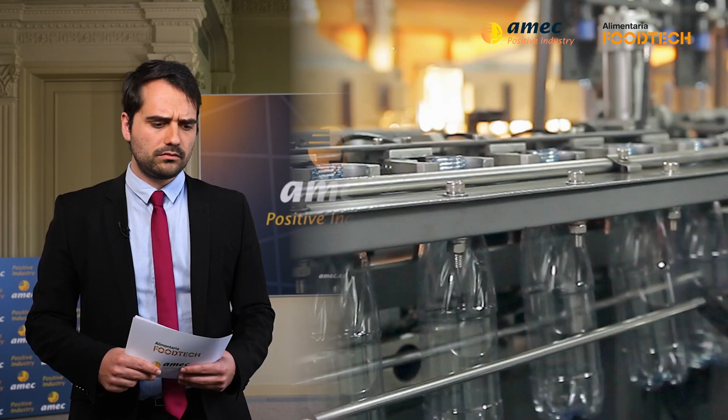With a strong transversal character, the event serves the food and beverage production industry, from raw materials to commercial distribution, including all solutions in areas such as processing, ingredients, label packaging, Industry 4.0, food safety, refrigeration, industrial and auxiliary services, handling, storage and logistics, and as a novelty of this edition, Smart Agro.

Naturally, it also addresses all processes: food processing, ingredients, food packaging, Industry 4.0, and food safety, as well as all subsectors of the industry - meat, liquids, fruits and vegetables, seafood, bakery, canned food, or snacks.

Furthermore, Alimentaria Foodtech is undoubtedly the meeting point of innovation for the most important companies in the sector, as well as small and medium enterprises, exhibitors, and national and international visitors.

This 2023 edition presents some proposals within this innovative framework that seek to further strengthen this competitive, disruptive character, such as the Innova Awards, the Emprende Awards, Ingrenova, where intermediate food products will be the protagonists, at the congress level the Biofilm Summit, and naturally the Foodtech Innovation Hub and Novarena.

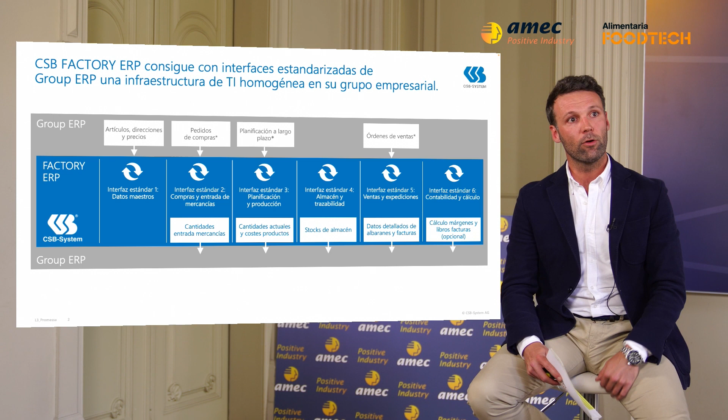In order to give a wider overview to the session today and the case we want to introduce to you, let's check the mother program behind this project, what we call Factory ERP. This is an ERP software solution to manage all the different plant systems in the industry. This solution, Factory ERP, is easily integrated using standard interfaces, in this case a group ERP for administration. We understand it as an administrative ERP where we can analyze accountancy and finance.

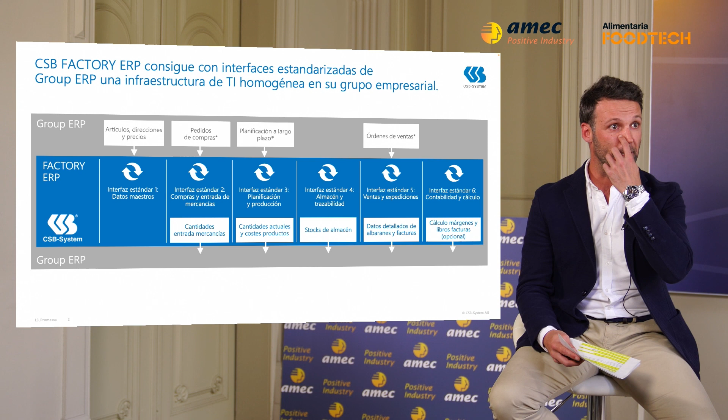However, CSB System also has a comprehensive separate tool with a module for accountancy and finance, but in case our clients feel already comfortable working in their own horizontal and consolidated ERP, we can get integrated into it. So our application supports integration with other ERPs and also integration with other partners or producers, especially for industrial equipment such as machinery and electronic appliances, PLCs.

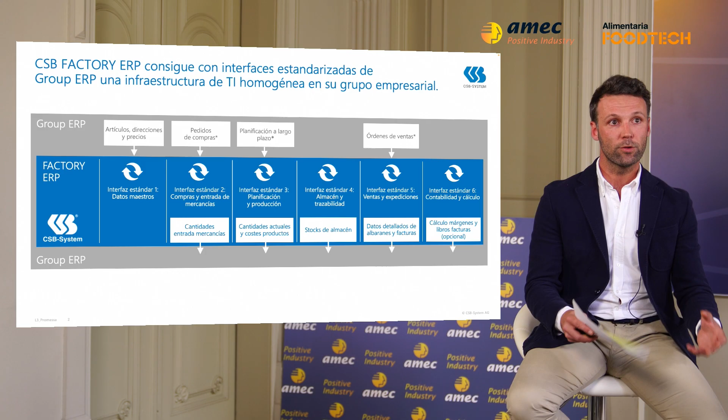RFID tags, etc. That's the reason why the session today we want to focus on how, using the automation and integration of all technologies under the same software solution, we have the chance and the capability to control everything that is going on in real time in our industry.

And the success case we want to introduce today has to do with the Dutch company Promisa. Promisa is a company dealing mainly with the production and commercialization of food products, meat products, and it has over 400 products that are distributed to more than 1,000 supermarkets over 6 days a week.

So in order to set the stage here, in the growing line of this company, they had been observing a need to find in the market some tool to digitalize different processes in the plant, because they thought they had breaches in terms of monitoring of processes, data, and work orders, and so on. This, along with their need for a wider space because they were not properly distributed, made them go to search to start up this project where they were looking for a combined solution between software from CSB SYSTEM and the hardware we're going to explain ahead.

So the project, in essence, was divided into big targets. First, digitalization, everything that has to do with the internal processes of the plant using the CSB SYSTEM solution, and then some other targets that have to do with the MFS or the material flow system. Among those targets, for instance, was better compliance with the expectations of the retail market of the country, better positioning against competitors, improve the internal logistics of the plant in order to reduce preparation times of their products and also costs.

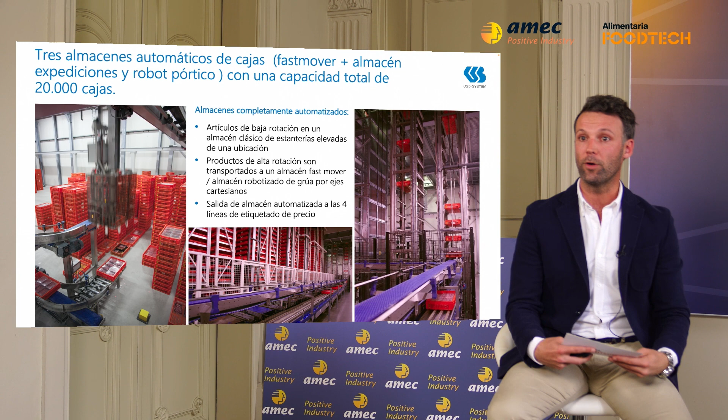Besides, in this project we have applied what we call merchandise-to-man technology. So these sorters or classifiers are separating trays depending on the work order they are processing.

Now I want to go more into detail regarding the tagging assembly lines and the communication and management between the different hardware partners involved in this project. First of all, one of the advantages that the operator has working with this machinery system is that she doesn't need to learn to work with different user interfaces, because all the management of the different processes, the communication with the assembly lines and the automated storerooms, are done from CSB systems. So the user has only one application from CSB system in which he can interact with the assembly line or with the storeroom in a frictionless way.

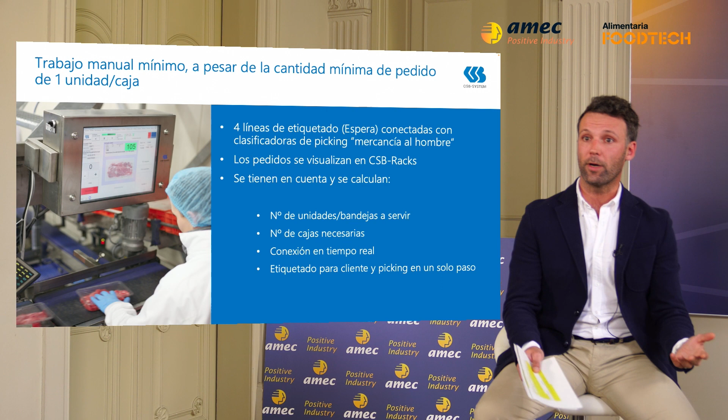So he can start the line, stop the line, and so on. Also, the operator can see the work order he's dealing with from the tagging line, what trays he needs to produce, how many boxes he needs. Also, all this productivity is real time, so from any spot along the plant we can monitor the progress of a work order in production.

For this project we have designed a technology in which in one single step we can perform two different actions. So from the moment we are tagging for the final client, all these different trays are identified, but they are also linked to the picking order for this client. So for this reason, later on we don't need an additional process to scan all the different tags.

I want now to go from the theoretical part to the practical side to show the outcome of the project back in the day. So this is the exit of the production line, and as you can see, we identify the trays or the baskets, not the boxes, by means of RFID, and then they go on to the storerooms we have already mentioned.

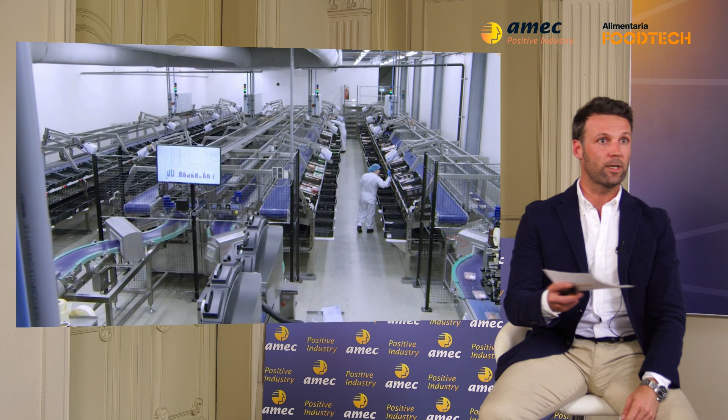This is the one with high rotation, with a big volume of products, that is automated and managed by means of the gate crane. And now we will see storage room number 2, the traditional and chaotic store. These two are the buffers that allow the product to enter into the tagging line, where the operator is checking the work order he's working on.

The 4 tagging lines are the ones feeding the 4 sorters, so we are using this merchandise-to-man technology I have mentioned, and then automatically when the basket is completed it goes on to the central line. So this merchandise goes on to the latest storeroom, where a robot also using this gate crane makes the stacking of the different columns for the final delivery to the client.

So all in all, the project, thanks to the technology of CSB systems along with some other hardware products, facilitated this client having faster reaction times. In fact, you can place an order in the morning, and even if it's one single unit, this is going to be delivered the same day.

Besides, in this project, we have included the chance to perform production along with picking, because we also have this 2-in-1 technology. Apart from this, all the business processes are much more optimized, balanced, and even transparent, and this also provides greater reliability to the final consumer. So in the end, this is a project we feel so proud of.

Thank you very much, Eric, for this very interesting case, this international success story, which this time has taken us to the Netherlands.

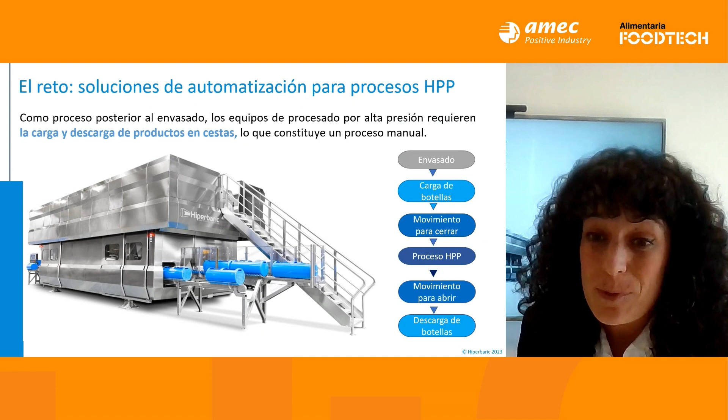So what is the challenge we face using our current machinery? Well, this is a post-process, so it entails a big volume of manpower for loading and unloading the machine. So the product has to be already packed, and once packed, we put it into the blue containers we can see on screen, and they go into the machine, so they are like transport means for the process. All this process is very manual.

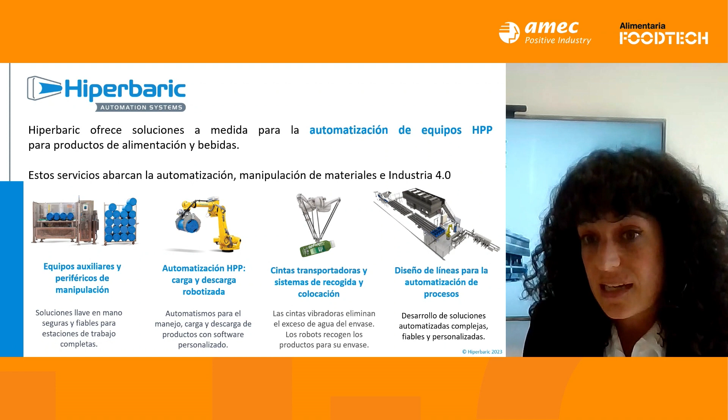Therefore, how is HIPERBARIC facing this challenge? Basically what we do here is provide customized solutions for the automation of this equipment. These solutions and services entail automation and manipulation of materials, and also Industry 4.0, which is the highest demand from our clients towards us. In order to provide this, we provide auxiliary and peripheral equipment for handling. We also automate the loading and unloading by means of robots. We also develop conveyor belts and systems for the picking and placing of the products, and we design lines for the automation of this process.

Going deeper into the success case, I'm going to give the context of Evolution Fresh. As I said before, it's an American-based company. They are the juice providers for Starbucks, for all Starbucks in the United States and Canada. They have 12 years experience working with high pressure, and they have five Hiperbaric 420 machines producing 3,800 liters per hour.

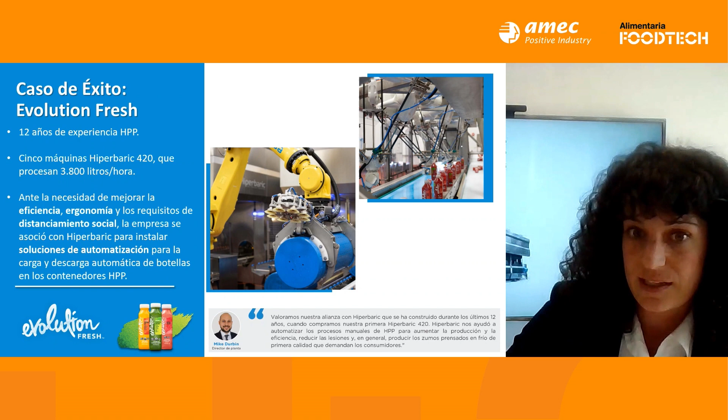Because they needed to improve efficiency, ergonomy, and the requirements of social distancing, the company decided to enter a new partnership with HIPERBARIC in order to install automation solutions for the load and unload of bottles in the HPP containers—those blue ones we've seen before that enter the products into our machinery.

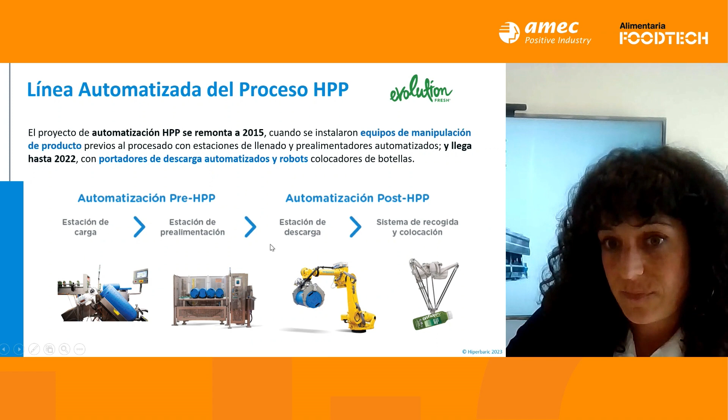In the case of Evolution, this development has been done in different stages. The first started back in 2015, where we automated the entering of the product into the machinery, adding loading and feeding stations. Then in the second stage, starting later after COVID, because they wanted to keep automating the whole line, it started in 2022, so we automated the exit of the machinery, incorporating unload stations and systems for picking and placing the bottles.

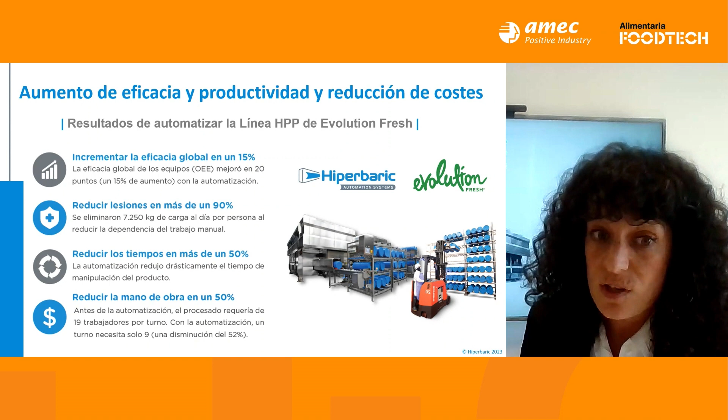What are the advantages of automating their 5 machines? Basically, they have raised global efficiency by 15%. They reduced the injury rate by over 90% because they removed 7,250 kilos of load per person per day. Product handling times were reduced by over 50%, and manpower needed was reduced by 50%. So before automation they had 19 operators, and after automation they were able to work with only 9 operators.

Now I'm going to play a video summarizing this success case.

So this was a bit of a summary of the peripheral and the machines we have installed there at Evolution. They partnered with HIPERBARIC for automation because they had references from us, from what we did with high-pressure machinery, and they were so happy—the feedback from the plant director Mike Durbin was really positive regarding HIPERBARIC. So this is all on my side. Thanks a lot.

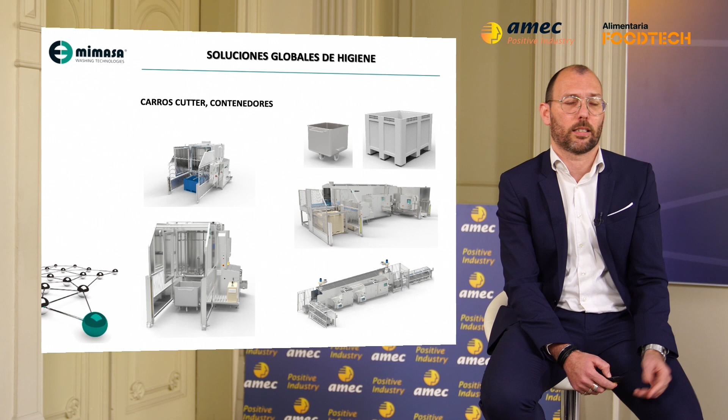These are the typical boxes we clean with our machinery—boxes of every type, pallets, trays, mainly for the food industry. We also clean the cutter trolleys well known in the meat industry, and containers used for fruits and also in the meat industry. We have different solutions—tunnels, cabinets—for cleaning these items, set up depending on the needs of each client.

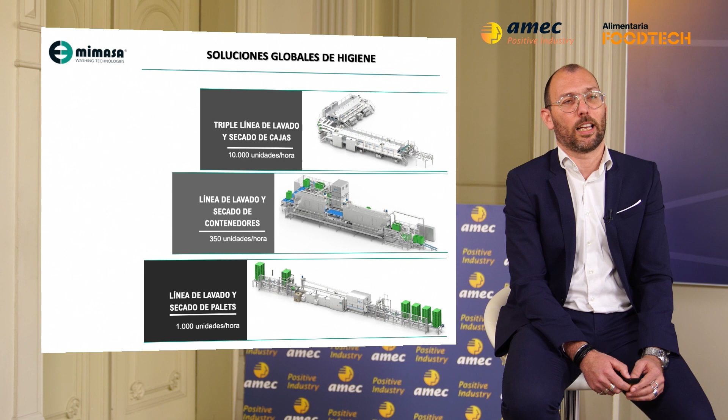So we have lots of cases. One of the rules at MIMASA is that it's not possible to build two machines that are the same—they may be very alike, but we always need to make adjustments to satisfy the needs of our clients. Then we have another line, a larger one, handling 10,000 units per hour, 350 units for high production, especially for companies dealing with logistics and the handling of different transport items.

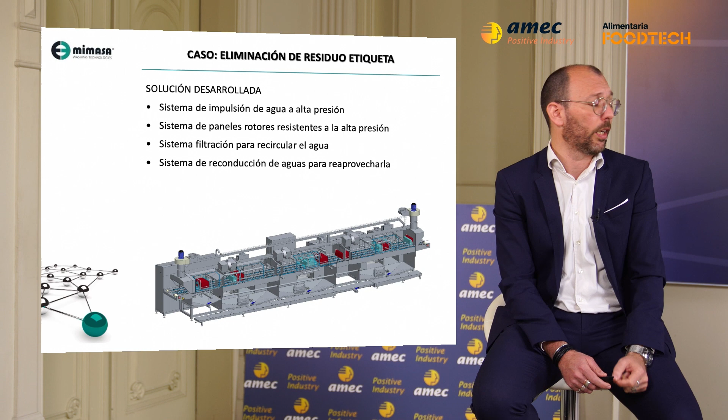First, a high-pressure water jet system, then a rotor panel system that keeps this pressure from the water jet pump until the projection against the tank, and a filtering system so the water can be reused within the same washing machine and the same pump, since pressure pumps are very delicate in terms of filtering. If we do not do it the right way, we cannot use this pump.

So we needed correct filtration of water so the pump can reuse it hours and hours. This was the second part of the problem, that the boxes were really soaked. So we built this reconduction system that collects water, and we managed, without diluting the concentration of detergent in the cleaning cycle, to better reuse this water.

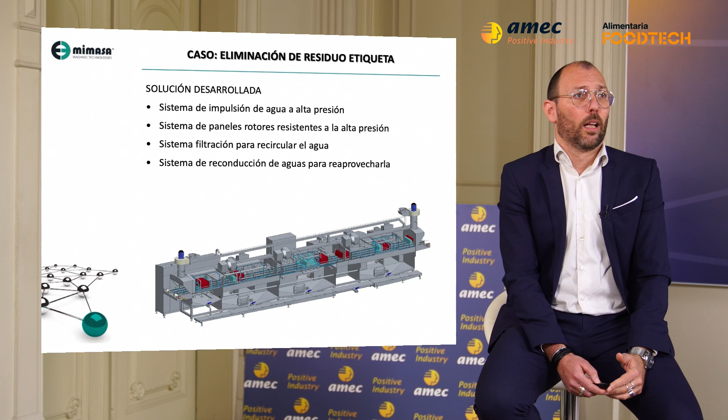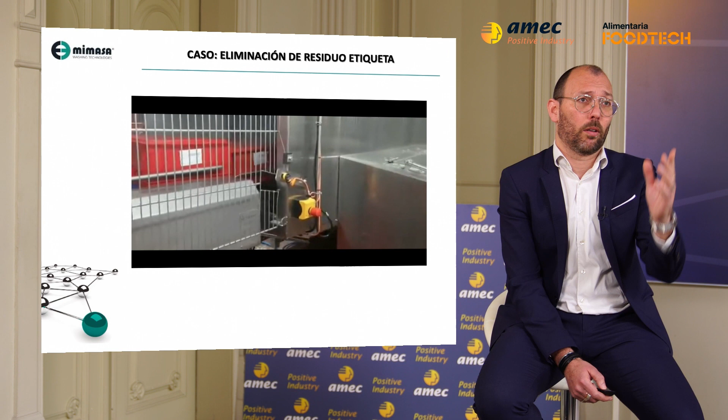So the results we obtained, apart from this beautiful box without tags, which was our main target with this project, we also avoided false detection, and we reduced water consumption by 95%. This is a very high number, but if you imagine a person handling a hose using 20 to 50 liters per minute, whether we remove the hose or not, the consumption would be so big. Thanks to this, it was no longer necessary to have a person removing those tags manually.

And here I have a homemade video of some tests we made. This really shows my point. Here we have a line handling 1,000 to 1,500 boxes per hour now. We are working with newer lines capable of dealing with 3,000 boxes per hour. Also, this one was for paper tags, and now we are working with one removing plastic tags, which is much more challenging, but we are dealing with it.

For me it was very interesting, because practically all food industries use tags, whether on boxes or containers, and being able to reduce or remove them is something we sometimes thought was impossible, and there were sectors that just accepted those tags being carried along. So it is possible to remove them efficiently, reducing water and power consumption. It's a matter of having the right focus for the project. And even here, we could only see the tag in one spot, but it could be anywhere around the box and it would be removed the same.

And this was the success case I wanted to share with you.

Very interesting, Albert, thank you very much for this detailed explanation. What you do at MIMASA, that machinery is never the same, isn't it? Well, you have no two alike, as you said, in this case of success. So if you think we can go on a trip, we take the leap.

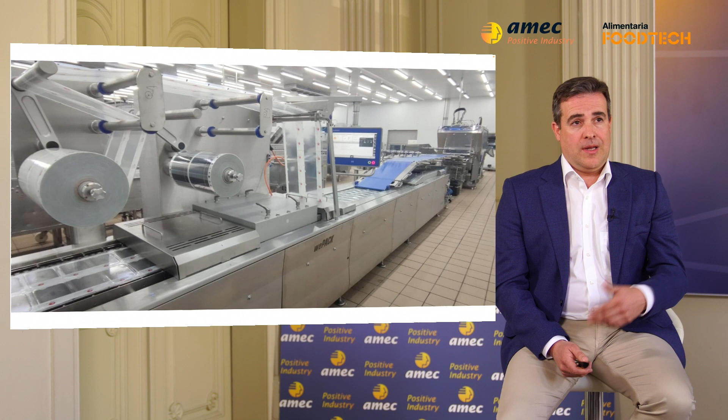And one example of what I said, that we are flexible and we like to listen to the needs of our clients, is this line that you can see on the screen, which we have recently installed in one of the main meat businesses in Spain. This group contacted us because they wanted to make business again and buy a new line for the slicing of Serrano ham.

And this is one more line, but one of the main problems we have nowadays in Spain and also in the rest of the world is the rise of the prices of raw materials, making us much more efficient in our lines, to reduce costs in order to remain competitive in the market.

So what we proposed to this client was something very innovative in the business, and this was being able to slice two ham pieces at the same time. This is different because everybody slices one ham piece. So one of the main issues when you slice ham pieces is that you always provide an added weight, what we call the overweight, because if you go under the weight, you can face a fine. So if the company is giving away product, they are losing money.

So what we did was build up this line made of a scanner, a slicer, then an automatic discharge and packaging, and then the selection of different packages at the end of the line, and this made the line much more efficient. But we had an additional problem, and this client's main product they provide is what is known as folding or folded ham.

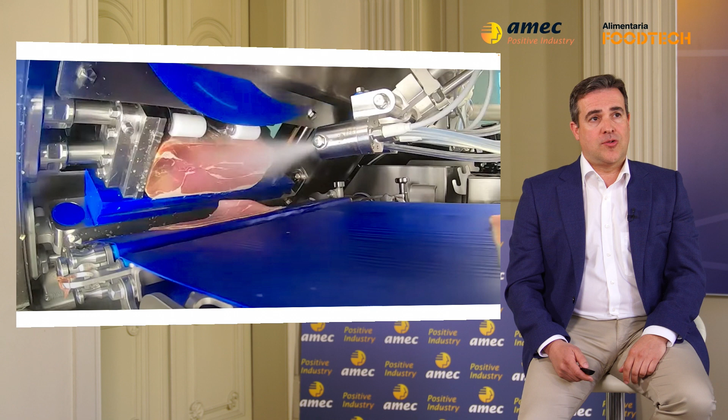So it is possible to do with one ham piece, but working with two, it was more difficult. So we worked on the solution, and these are the results.

Perfect, clear and concise. Thank you very much, David, for the presentation of what you do at Weber and for this national success story. So, do you think we should now take the leap, cross the Atlantic and go to the United States?

It seems our delegate there, Marta Andreu, has just one question for you. Good morning, Marta, how are you? Hello, good morning David and Albert.

First of all, I congratulate you for this session and for these success cases, so interesting, that you have provided to us. Here in the United States, European developers of machinery for the food industry are really appreciated, and their technology and quality is very valued, especially the flexibility to adapt to the different needs of American producers. But post-sale service and technical services, and when they will receive the parts they need, are the main concerns of these American companies. Could you please explain how you have tackled this problem?